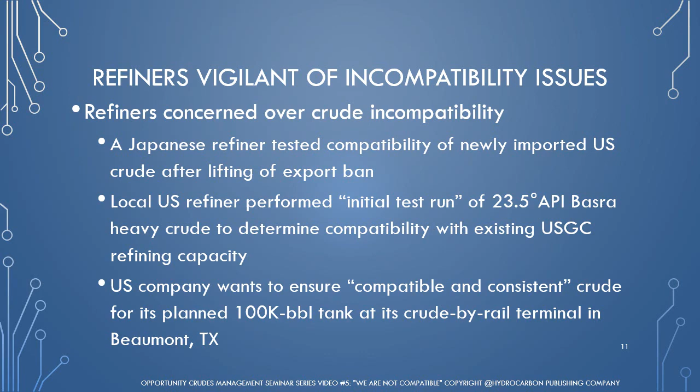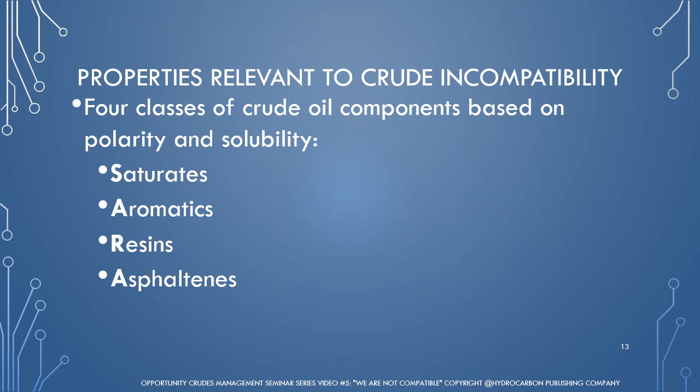Crude incompatibility that leads to fouling problems is often caused by changing the ratio of four crude oil components that are defined by polarity and solubility. These components are saturates or paraffins, aromatics, resins, and asphaltenes. The acronym SARA is often used to refer to the four components.

There are three types of crude compatibility issues that refiners must be aware of. These are self-incompatible crudes, incompatible crude blends, and nearly incompatible crudes. In this seminar, we will discuss the unique characteristics of each of these compatibility issues, models to determine crude compatibility and to predict fouling, along with commercial options including software and analyzers.

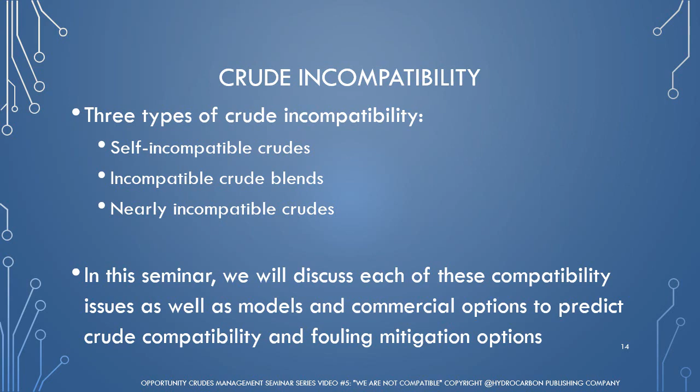Irv Wiehe of Soluble Solutions has created the colloidal dispersion solution model, which shows how asphaltenes would normally behave in stable crudes. First, the asphaltenes, which are considered the solute, are dispersed by resins, the dispersant. Later, the complex is dissolved by small ring aromatics, the solvent, then later by saturates or paraffins, both considered to be non-solvents. The image on the right shows Wiehe's model.

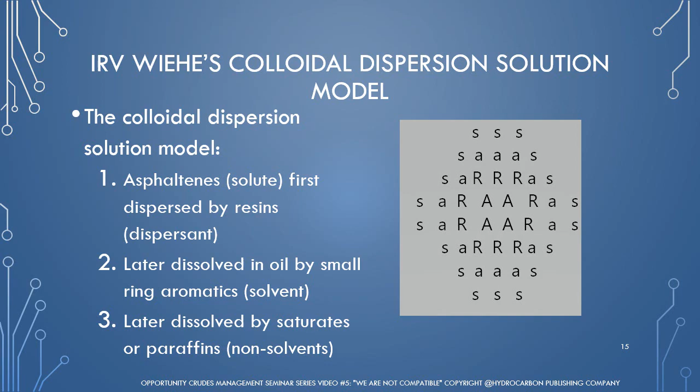Self-incompatible crudes are those that are prone to asphaltene destabilization and fouling even when not blended with other crudes. Such crudes are more likely to cause fouling and processing problems than compatible crudes. More than 30 such crudes have been identified, including Mexican Isthmus grade, even though it has been recommended that refiners generally avoid buying self-incompatible crudes.

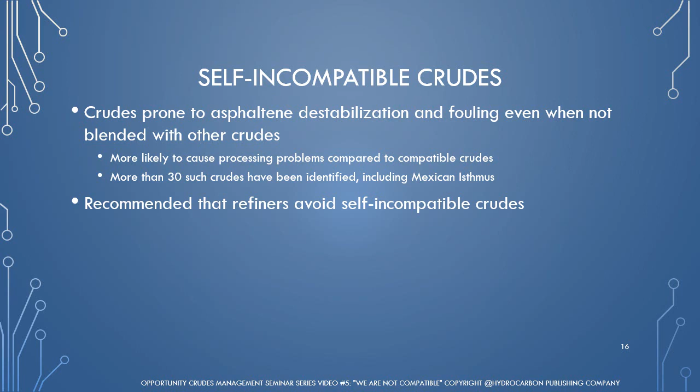The frequency of self-incompatibility observed for West Texas Intermediate is increasing due to accidental and intentional contamination. Intentional contamination occurs when tight oils are blended with West Texas Intermediate along with Canadian heavies to match the gravity and density specifications of West Texas Intermediate, but this results in the precipitation of asphaltenes.

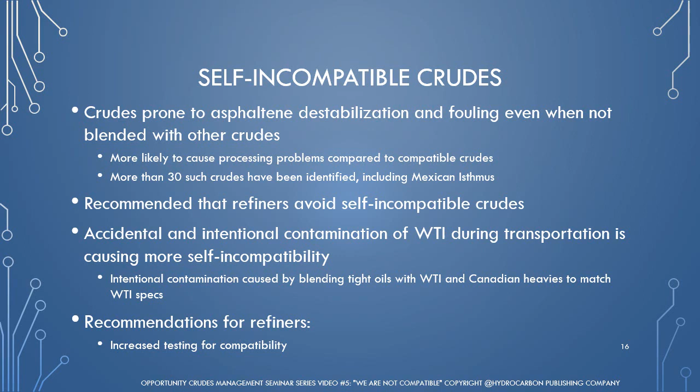Since 2011, it has been found that 75% of West Texas Intermediate samples are incompatible, compared to no incompatible samples found before 2011. To avoid self-incompatibility, it has been recommended that increased testing be done for compatibility, as well as transport of crudes that are compatible with both light oils and heavy oils in between shipments of the latter two.

Incompatible crudes are those that are stable individually but unstable when blended. When incompatible crudes are blended, a change in the ratio of the SARA molecules or an increase in the concentration of saturates such as paraffins may occur. Both of these events may lead to asphaltene destabilization.

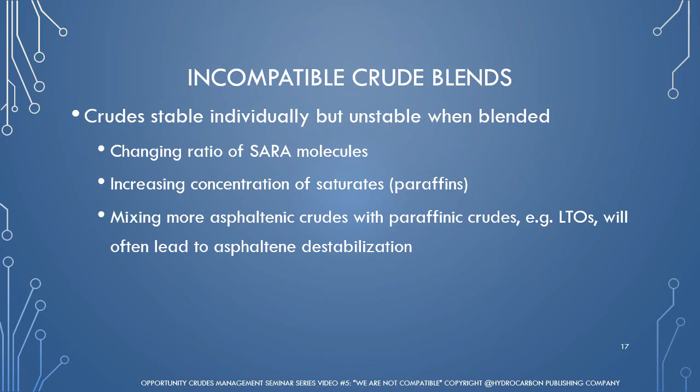In general, mixing asphaltenic crudes with crudes that are more paraffinic, such as light tight oils, causes the asphaltenes to become destabilized. Crudes being combined in the wrong order is a reason for crude incompatibility. Other reasons for incompatible crude blends include incompatibility over some range of composition, and, for certain blends, high temperatures.

Incompatible crude blends cause asphaltene and paraffin immiscibility, leading to asphaltene precipitation. This has numerous deleterious effects in the refinery, which include lowering of capacity in crude tanks, emulsion formation in the desalter, and fouling and coking in preheat exchangers, distillation unit furnace tubes, and catalyst beds.

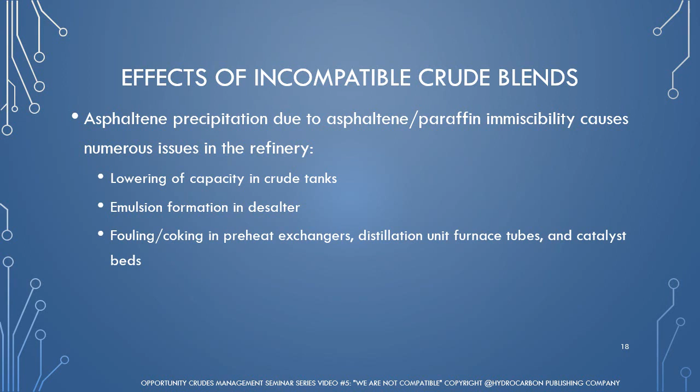In order to avoid these problems when blending tight oils and heavy crudes, refiners should blend tight oils with heavy crudes with an API gravity of 13 to 16 degrees to yield a blend with an API gravity of 21 to 23 degrees.

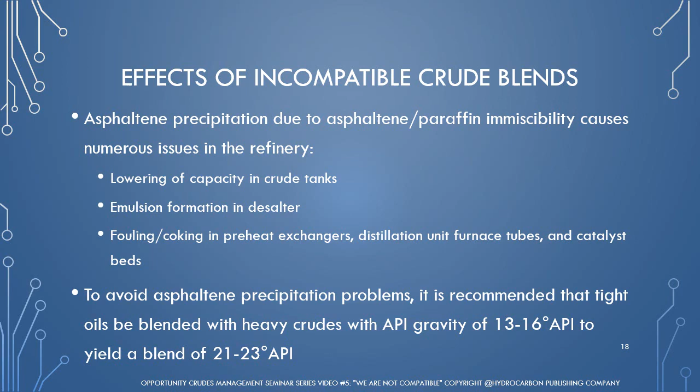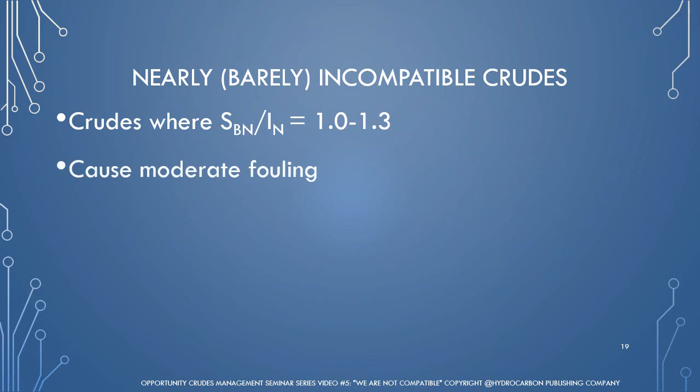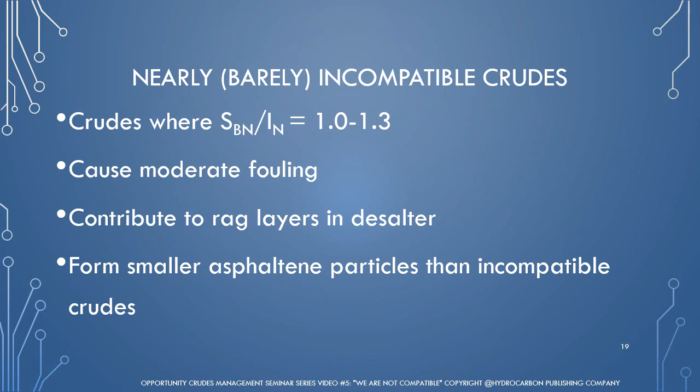According to the oil compatibility model, which is one option for determining compatibility, nearly incompatible crudes have a solubility blending number to insolubility number ratio in the range of 1.0 to 1.3. Nearly incompatible crudes are likely to cause moderate fouling and contribute to rag layers or emulsion layers in the desalter, because nearly incompatible oils form smaller asphaltene particles than those formed by incompatible crudes. Nearly incompatible oils cause more stable water-in-oil emulsions, because the smaller asphaltenes are able to more tightly surround water drops.

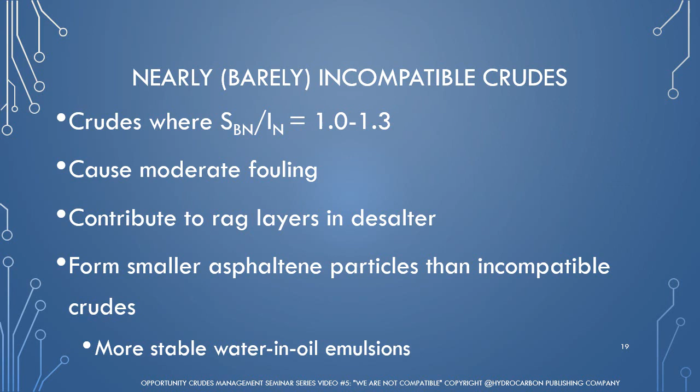The blending of incompatible crudes will often change the ratio of the SARA molecules. This may ultimately result in asphaltene instability. For example, the mixing of more asphaltenic crudes with more paraffinic crudes, such as light tight oils. Research has shown that the total quantity of asphaltenes also has a direct effect on the severity of asphaltene fouling.

As a result of crude incompatibility, asphaltene instability may occur. Asphaltene instability has been attributed to numerous issues in the refinery, including decreased energy efficiency, increased carbon dioxide emissions, higher frequency where heat exchangers need to be cleaned, and increased crude throughput. In order to prevent these problems, it is important to know the chemistry and structure of asphaltenes.

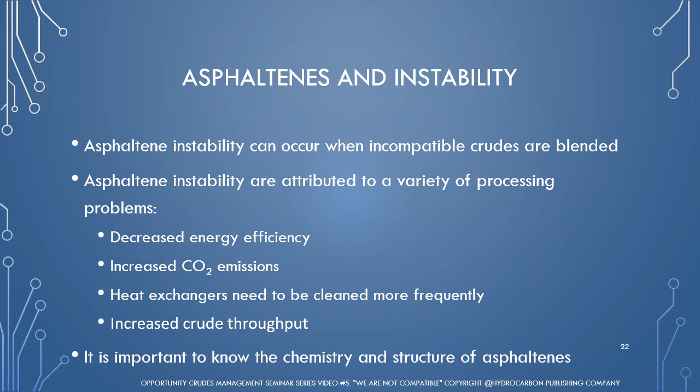The asphaltene fraction is currently defined as the oil fraction that is soluble in aromatics but insoluble in paraffins. Typically, the asphaltene fraction is identified using its solubility in toluene and insolubility in N-heptane. However, as more research is done in determining the structure of asphaltenes, this standard may change. The asphaltene composition is influenced by multiple factors, including the choice of solvent, contact time, and solvent-to-oil ratio. The exact structure of asphaltenes, however, is still a subject of debate.

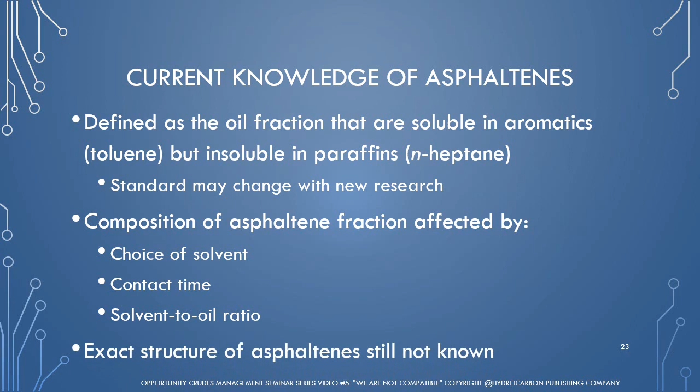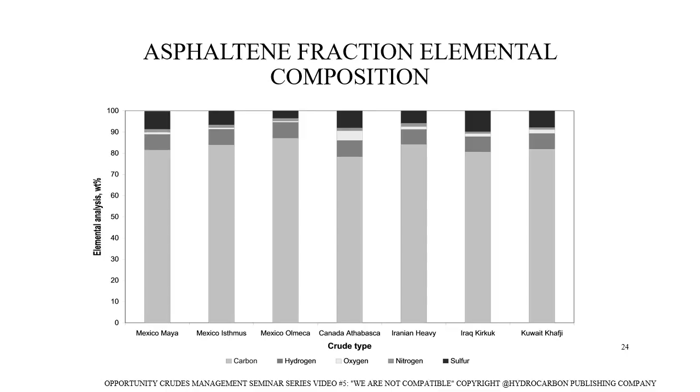As mentioned previously, there is still no consensus on the structure of asphaltenes. In fact, there are different models with evidence to support each. The two most prevalent are the pericondensed model and the archipelago model. The pericondensed, or island, or continental model describes asphaltenes as large sheets of polyaromatic molecules with alkyl and alkylphenol chains, while the archipelago model describes the structure as naphthenic and aromatic components linked together with alkyl or thioether bridges.

There is spectrometric evidence for the structures of both models in asphaltenes. The pericondensed and archipelago models are both shown on the left. A third model, proposed by Soluble Solutions, describes asphaltenes as having high molecular weight and being comprised of multiple large polynuclear aromatic segments held by dispersion or van der Waals forces instead of hydrogen bonds. The three proposed models state that changing certain SARA molecules will cause aggregation.

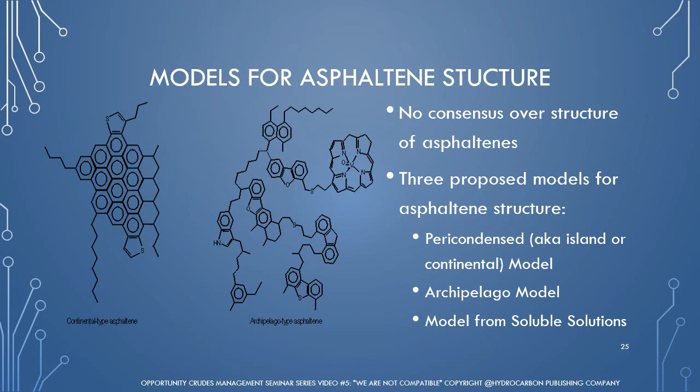Because asphaltenes are defined by solubility, there are multiple factors, which include solvent choice, contact time, and solvent-to-oil ratio, that may affect which molecules would be found in the asphaltene fraction. To minimize interference from these factors, asphaltene tests should be run for at least 8 hours, and a solvent-to-oil ratio of at least 60 to 1 is used. Using a solvent with a low carbon number may result in a lighter, less polar asphaltene fraction.

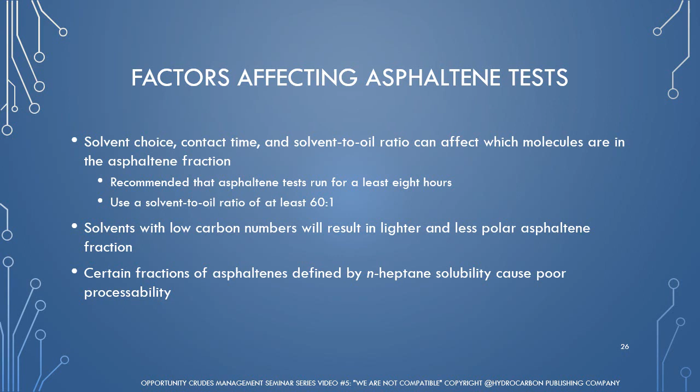One study has found that only some fractions of asphaltenes defined by N-heptane solubility are responsible for poor processability. More specifically, the study found that the crude fractions that were insoluble in N-methyl-2-pyrrolidone were the most unstable. Furthermore, temperature is an important variable when testing for asphaltenes, as it was found that increasing temperature decreases the onset time for precipitation. It has been hypothesized that decreasing viscosity is the prevailing factor.

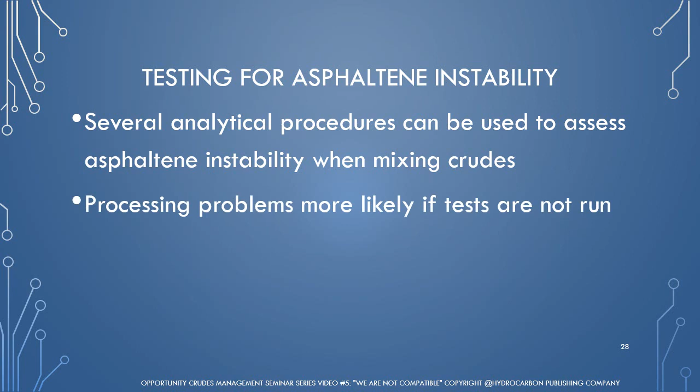Several analytical procedures allow refiners to assess asphaltene instability when mixing crudes. According to representatives at a past American Fuel and Petrochemical Manufacturers Q&A session, even though these tests do have their shortcomings, refiners are more likely to face problems if they do not perform any tests. Most tests involve titrating the crude with a non-solvent, either by hand or automated process, and detecting flocculation either by human eye or using laser transmittance or near-infrared spectroscopy.

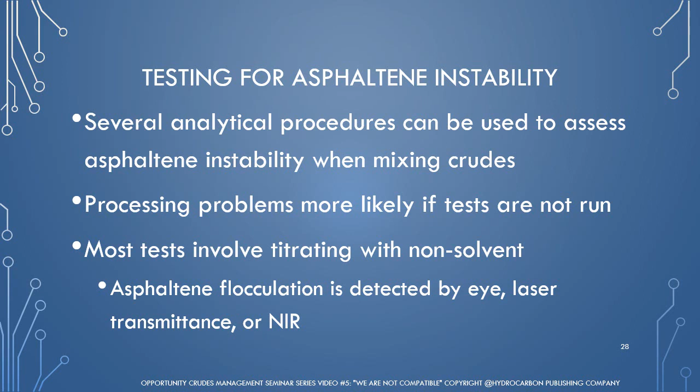To determine blending compatibility, Dr. Wiehe requires the resulting p-value, which is equal to the ratio of solubility blending number to insolubility number of the blend, to be equal to or greater than 1.3. This calculator requires a more conservative p-value of greater than 2.0. As such, the optimal percentage of diluent in the blend is calculated as that which gives a p-value of exactly 2.0.

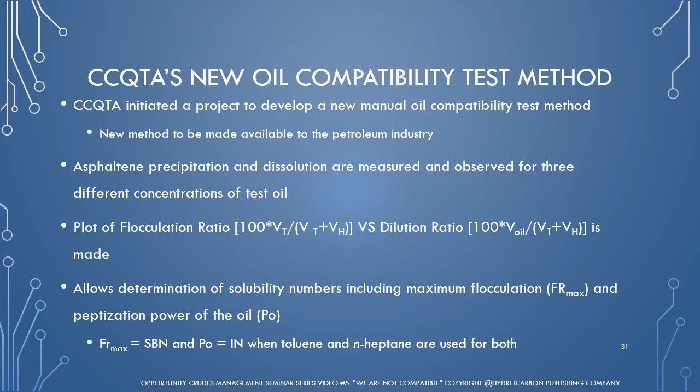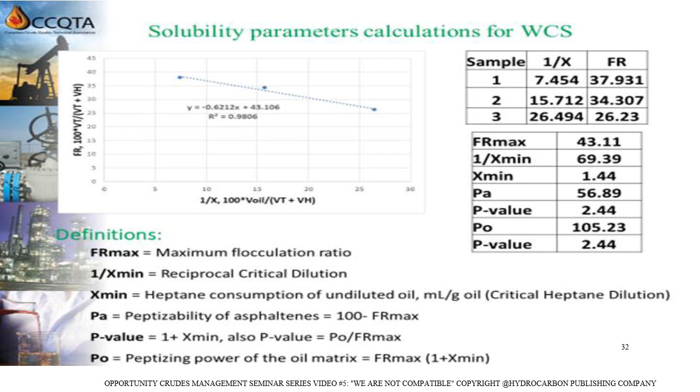The maximum flocculation and peptization power of the oil numbers determined by this method can be used for a number of applications. The peptization power of the oil to maximum flocculation ratio can be used to determine asphaltene's stability and to control the process severity and prevent coke formation in the refining process.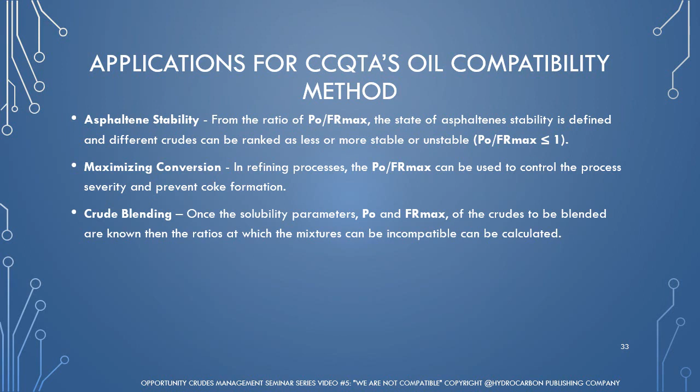The two solubility parameters allow the calculation of the ratios at which the mixtures can be incompatible. Finally, the value of the peptization power of the oil is needed for diluents added to make bitumen suitable for pipeline transport.

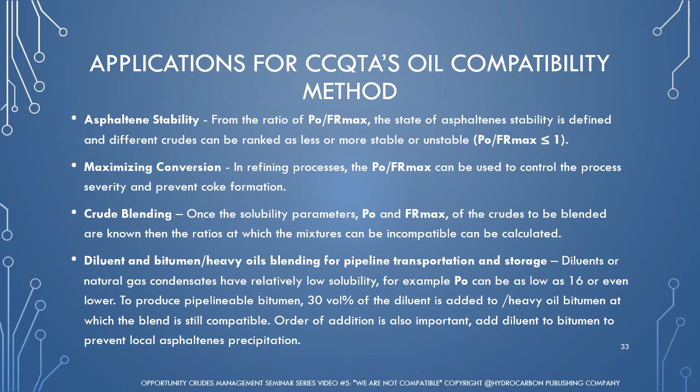Most methods to test for compatibility determine solubility by titrating the crude with a non-solvent until asphaltene flocculation occurs. These commercially used tests can either be performed by hand or by automated procedure, and the flocculation is either detected by eye or near-infrared spectroscopy or laser transmittance. As flocculation increases, the light transmittance decreases.

Spot tests, such as ASTM D4740 and a modified version of ASTM D4870, can also be used to determine the compatibility of a crude blend according to an ASTM manual called Crude Oils: Their Sampling, Analysis, and Evaluation by Harry Giles and Clifford Mills.

Spot tests require that a small sample of the blend be analyzed via paper chromatography. A ring around the spot indicates incompatibility.

Additionally, for a crude that does not contain asphaltenes, the solubility number may be determined by blending the crude with a reference oil that does contain asphaltenes and then adding N-heptane until asphaltene precipitation occurs. ASTM D7112 and ASTM D7157 are two automated instrumental test methods that determine compatibility and stability.

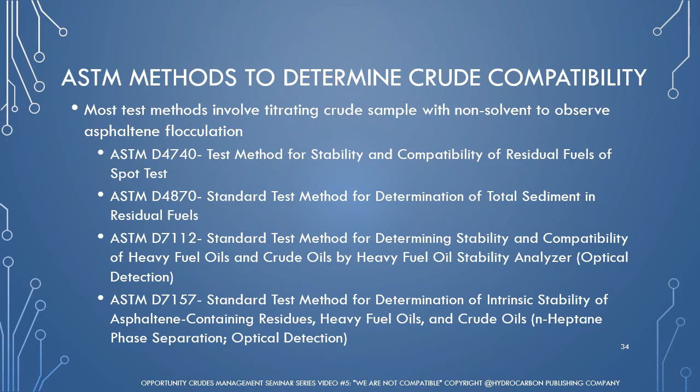In order to prevent problems with crude instability, incompatibility, and fouling, refiners have multiple commercial options they can use. These options include commercial analyzers, methods, models, and software to predict crude compatibility, fouling, and stability.

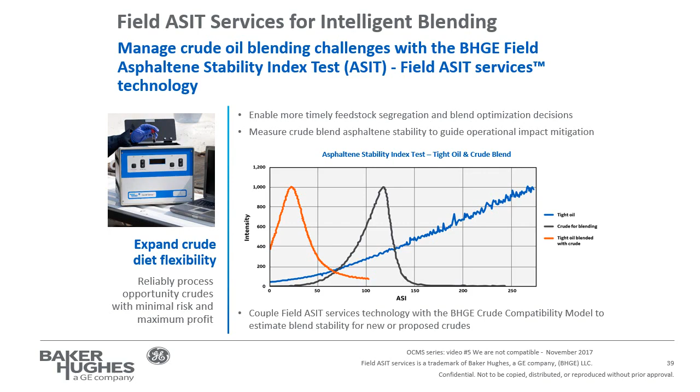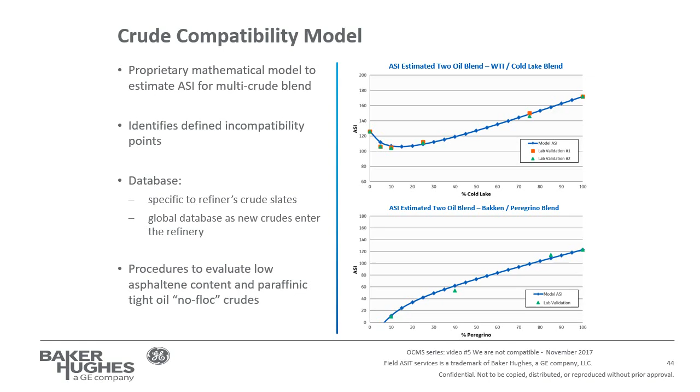Crude traders, buyers, and refiners must have keen knowledge of the important selection and blending criteria in order to properly prepare, evaluate, and process look-alike crudes.

While these look-alike crudes may be an economical choice, many problems may arise when they are not selected properly. Without a doubt, crude compatibility is a paramount criterion, as crude incompatibility can lead to asphaltene instability that causes multiple operating issues. The costs from these problems may outweigh the benefits of using cheaper crudes.

The problem of crude incompatibility may be especially prevalent in today's market, where refiners are often incentivized to process new crudes for the first time and to use cheaper grades. Luckily, there are models and commercial options available to predict potential incompatibility and fouling. Therefore, it is up to individual refiners to make the right selections to avoid potential problems in operations.